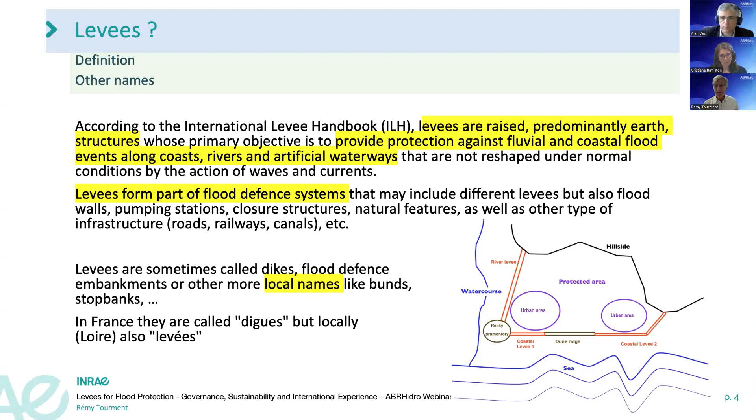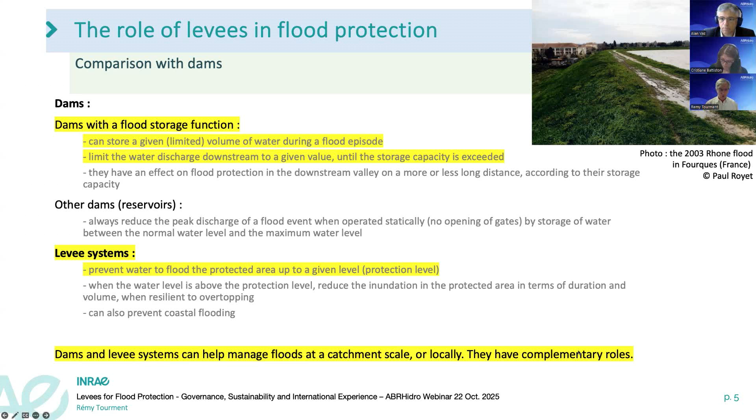When we talk about levees, we have to compare with dams, because I understood the talk about your legislation in Brazil - levees are part of the dam legislation. But in hydraulic function, dams usually have a flood storage function; dams keep water in, while levee systems prevent water from reaching a protected area. So there may be in some way an opposite function, even if both retain water - one keeps water in, the other keeps water out. In terms of flood management, both dams and levees can help manage flood at the catchment scale or locally. They have complementary roles.

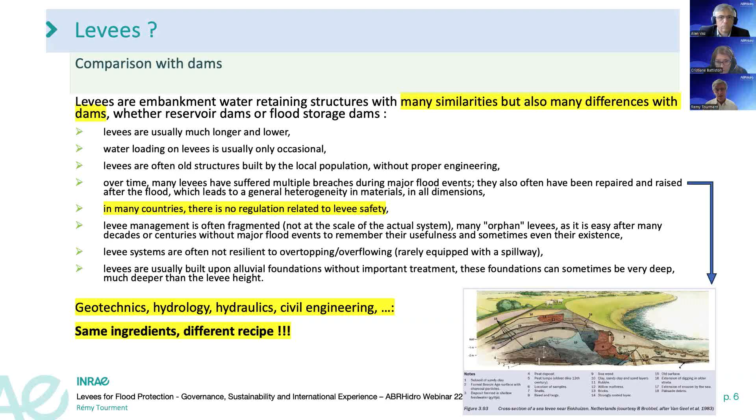Levees and dams have many similarities but also many differences. The ICOLD technical committee that I'm chairing is working on a bulletin comparing dams and levees in detail, in order to benefit from all the literature about dams for levees, and also about levees for dams. One of the main issues is that in many countries there is no regulation related to levee safety - at least that's the situation up to some point, and I will get later to the creation of this regulation. Dams and levees use the same techniques and scientific disciplines - geotechnics, hydrology, hydraulics, civil engineering - but when you look into detail, there are some differences, so I like to say they have different recipes with the same ingredients. You can see one of the main differences between dams and levees on the screen: a cross-section of a Dutch levee showing it's very heterogeneous because of its history and long length - so many differences and a different complexity.

Some data about levees in the world. We published ICOLD bulletin 196, based on about 20-25 countries, and we estimated the total length of levees across the world at over 500,000 kilometers. I hope the statistics will be more precise in the future. At least 20 countries have a major levee portfolio of over 1,000 kilometers of levees, and some of the oldest ones were constructed over 4,000 years ago, in China in particular. These levees provide flood risk reduction to over 700 million people - 10% of the world's population - protect several trillions of dollars in property and economic value, preventing billions of dollars in economic damages across the world each year.

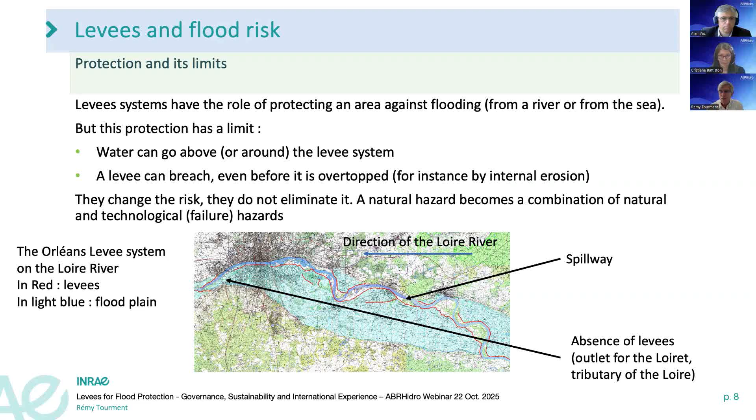And we also have to notice that from a natural hazard, which is a river flood or a sea event, we then have a combination of a natural hazard but also a technological hazard, which is the failure of the levee system.

And we also have to understand that the breach in a levee is much worse than a natural flood because of different factors. One of them is a quick event with high water level, so very important water discharge, water speed, water height, which would not be the case if the water was rising with a natural flood.

Also, populations behind the levee think they are protected. The breach is not expected, so they are not prepared. Unlike when there's a slow water rising, the limit of protection is not generally understood by the population.

And also, because of the presence of levees, there is development in flood-prone areas because they are less frequently flooded. Only the major floods cause problems, but people can forget this can happen.

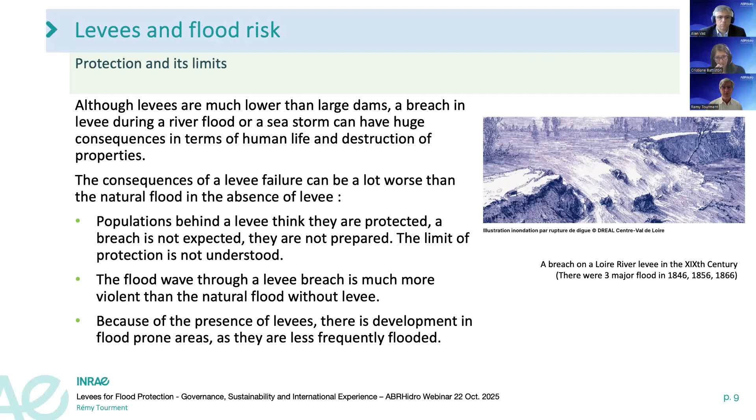In France, in order to understand and deal with these problems, we introduced the concept and definitions of protection level, safety level, and also danger level.

Protection level is a level until which the protected area is not flooded. The safety level is a level until which the levee failure probability is negligible, and the danger level is the level above which the levee failure is highly probable.

Considering independently the safety level and the protection level is very important in terms of proper risk management. Some other countries are progressively adopting this approach as opposed to a simple safety standard. In a safe levee system, the safety level must be above the apparent, or geometric, protection level, which is the level until which the protected area is not flooded if no breach occurs because the levee is overtopped.

These concepts, when you think about it, are quite easy to understand, but sometimes they are overlooked because people tend to think, well, the levee is there, it's protecting. But I will get back later on the way to deal with this issue.

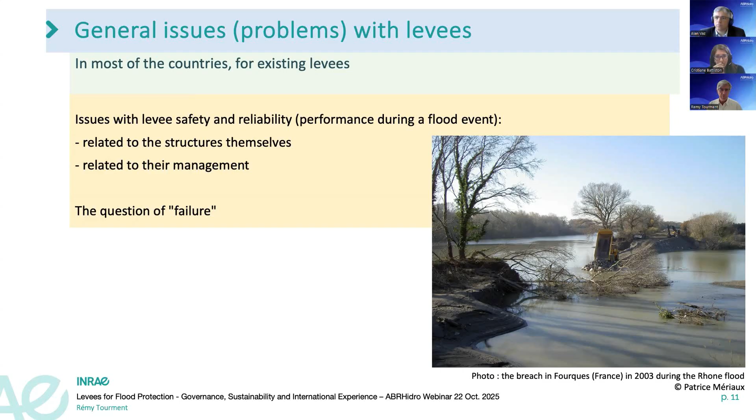The main problems with levees are caused because existing levees are often old, very old, and also aging over time, and also heterogeneous, as we have seen on this picture.

To give you an idea of the age of levees, I talked about the Chinese levees being 4,000 years old. In France, we have levees dating up to the Charlemagne Emperor, which is about the year 800, so more than 1,000 years.

Another issue is that many levee systems are not resilient to overtopping, and soon after they are overtopped, a levee will fail and cause a major catastrophic event. So you move from a protected situation to a very dangerous situation, which is not good in terms of risk management.

The performance of the levees is uncertain because they are old. There are no regular assessments. In some situations, there is even a lack of awareness about the existing levees, locally or even sometimes at the national scale.

There is a lack of information about specific levees, about their design, their construction, what happened in their history, repairs, who owns them, who manages them.

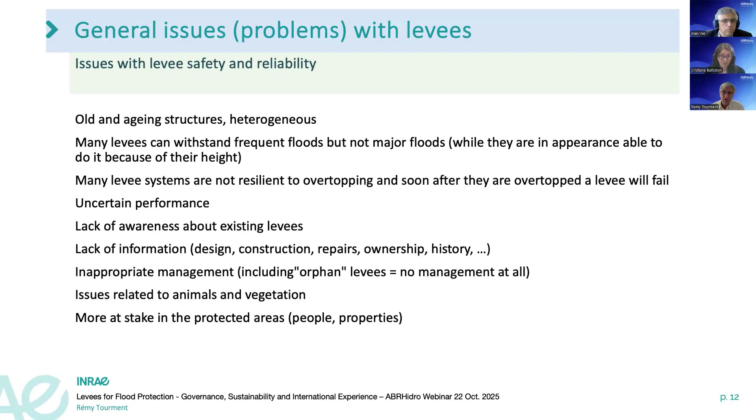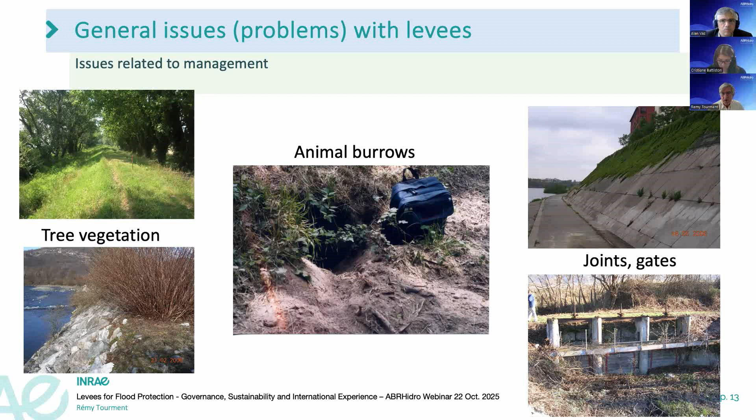Some pictures you can see on the left, vegetation grown on the levee can cause problems like internal erosion, breaches caused by the wind, animal burrows, and lack of management in the joints between the concrete slabs. Also, lack of management on the gates can create problems.

So when we started to work on the International Levee Handbook and discuss failure, we realized that unlike dams, we have to consider two definitions of failure: the hydraulic failure, which is a failure of the protection function, happening when the protected area is flooded before the intended level of protection is reached.

And the structural failure, which is more classically when a levee breaches—well, it's pretty obvious. Hydraulic and structural failures are not independent, but it's important to identify them and deal with them separately in a functional approach and in a risk management approach.

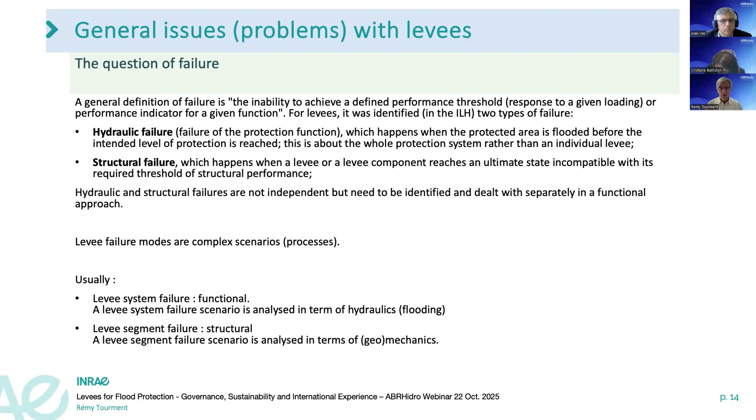Also, we have found that levee failure modes are complex scenarios or processes, and usually a levee system failure is functional—a scenario analyzed in terms of hydraulics and flooding—while a levee segment failure is structural and analyzed in terms of geomechanics, if it's an embankment levee, which is the case of most levees in France and in many countries.

Some examples of complex levee failure scenarios. We have on the screen two scenarios initiated by scouring, which happens during normal water levels. On the left, you have the levee—well, the word on the screen is dike.

Scouring causing collapse of a now unstable part of the levee. This can happen at any time. You don't need a flood.

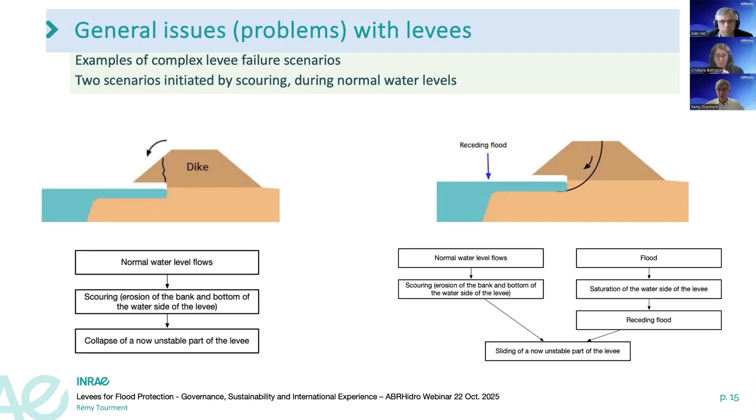And the other scenario on the right: you have scouring, which occurs during normal water levels. Then you have a flood. Then the flood recedes, and the water side of the levee becomes unstable, and there is a sliding of this part that can also cause a breach.

Two other examples of complex failure scenarios for levees involve different internal erosion mechanisms. I don't think I have time to explain these two scenarios in detail, but you can see that the different mechanisms of internal erosion actually happen successively in the same place or simultaneously in different locations.

One of the references at the end of the presentation presents this very interesting new concept in more detail. It's called failure paths for levees.

Now, the other part of my presentation, the more positive part, is how to deal with this situation. In many countries, in many places, regions, states, there is an existing portfolio of old levees that are not safe. How can this portfolio become safe and reliable in terms of flood protection?

So there are different steps. What I will present here may sound like giving lessons to countries like Brazil who haven't started this process. It's not like that—we don't know better. We all came from the same starting point.

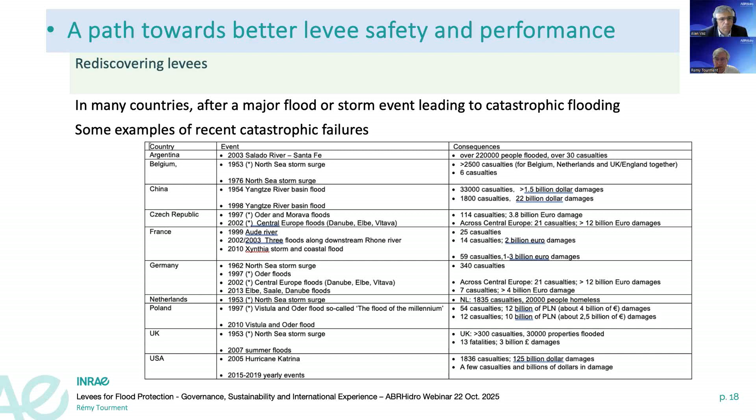So as you can see on the screen, there are sometimes a lot of casualties, a lot of damage. I don't need to insist on the catastrophic side of the consequences of levee failures. I will say it again: much more dramatic than the natural flood if the levees were not there.

After this catastrophic event, these floodings, we found that in most countries, levees were often forgotten or at least improperly managed, without a national policy, left to local initiatives, poor management. So what happened after these floodings?

In France, we have archives about flood events from the 18th and 19th centuries, and that was done in the past. But we noticed in the 20th century, when floods occurred, repairs were made, but as they were not properly managed, they were not safe anymore—tens, decades, or centuries after the repairs.

So the second strategy, which is the right one, is to have a long-term strategy for proper management to guarantee performance. Building and repairing levees as a strong structure is not enough—there is a need for management in the long term.

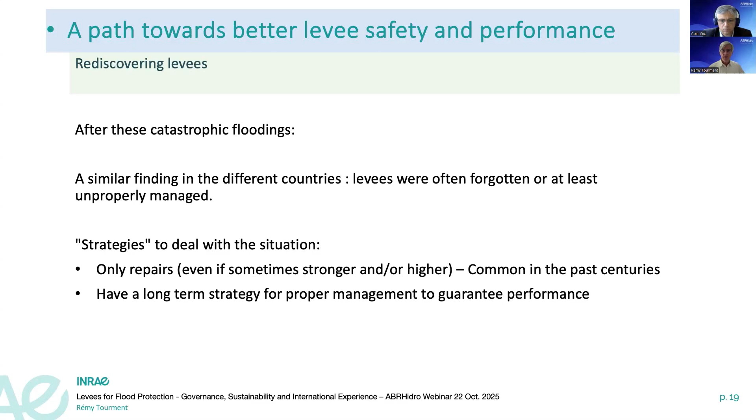So to improve the situation, there are two scales. According to the situation of the country, local stakeholders, the regulation, and the willingness of country officials or local officials, it can start at the local scale or at the national, regional, or federal scale. It depends—there isn't one right way.

It can start on one side and follow on the other scale, from bottom to top or from top to bottom. At some point you need to have all responsible persons at the local and national scale involved. There are two main axes to improve levee safety performance: management and engineering.

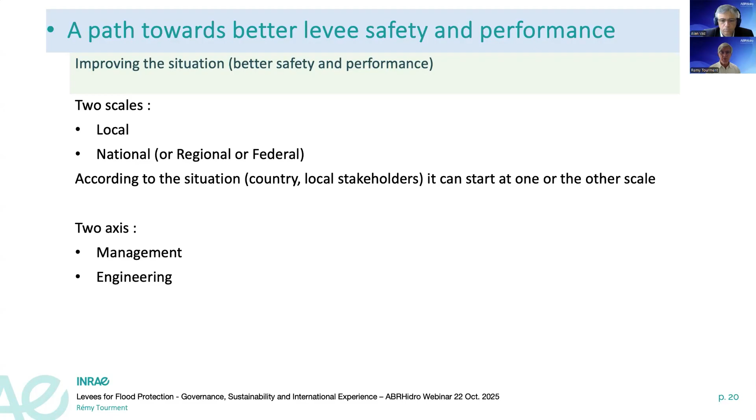The lessons learned in terms of organizing governance: levees need proper management. Management must be organized at the system level. The system level, as you have seen in one or two of my diagrams, is a system that protects a protected area—a consistent hydraulic function of protection.

These systems must not be split between different management organizations, because it will be inconsistent, and sometimes what is done on one side is useless because it's not done in the right way on the other side.

This can be at the local initiative—the organization of management—or a national decision. Sometimes even a specific regulation is needed. It's important in any case, in the long term, to have a national framework defining roles and responsibilities.

It can be similar and coordinated with dams, but it needs also to take into account the differences between dams and levee systems.

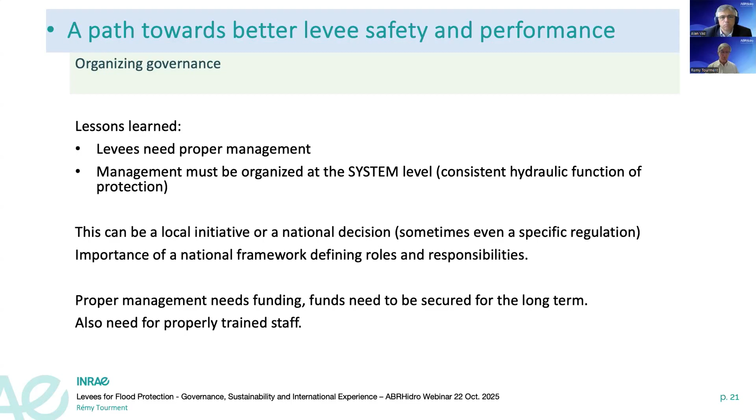So there is some difficulty. We are improving the situation in France and in many countries, but who knows what will happen in the future. We have to remind ourselves permanently that risk has to be managed in the long term. There is also the need for properly trained staff.

The role of managers of levee systems, local management, their function is to ensure that the levees will be able to perform as required during any flood event, ensuring the defined protection, no flood until the protection level, but also not aggravating the flooding of the protected area in case of a breach, structural failure, or any other type of functional failure.

I will give you an example of a functional failure without structural failure. If you have gates to close during a flood event, you may have levees with openings and gates that you need to close. Well, if you can't close the gate, or if you forget to close it, this is a functional failure. There is no structural failure, but anyway, you will be flooded before the protection level.

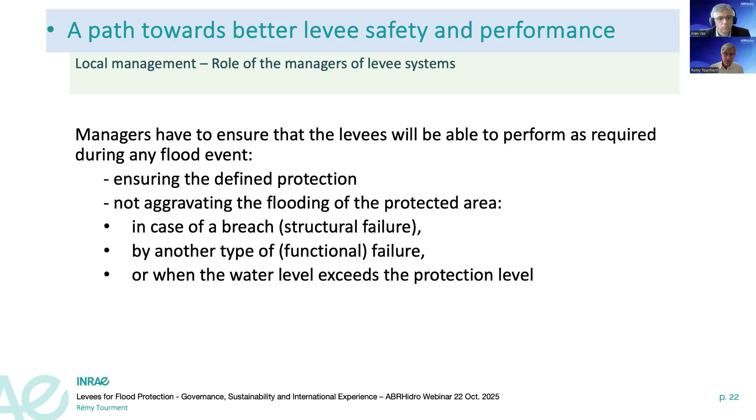Also, when the water level exceeds the protection level, you have to be sure that the resulting flood will be acceptable, will not be worse than the natural flood. So for this, the management needs to clearly define its organization.

Managers need also to manage data, the information about the levees, about the events, because it's needed in the future for repairs, for assessments. Emergency preparedness is important in order to make emergency repairs to avoid breaches during a flood.

Conduct regular inspections, safety and risk assessments. Based on these inspections and assessments, conduct follow-up actions like maintenance, major repairs in case of large damage, and even sometimes changes in the system — creating new levees, moving a levee, creating a spillway, and so on.

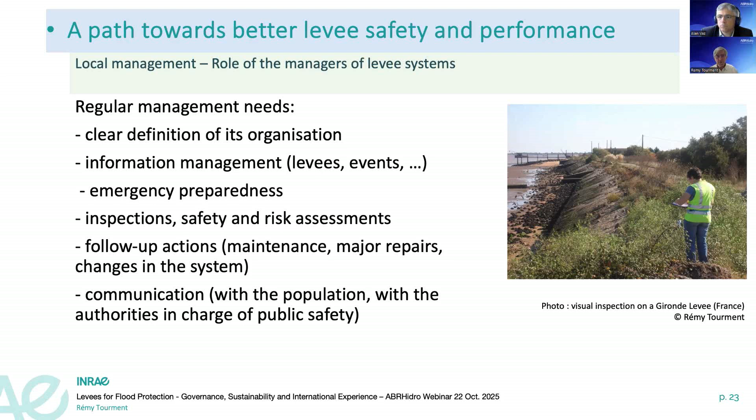And also an important part is communication with the population, for them to be aware of the risk and to have the right attitude during a flood event, but also with the authorities in charge of public safety, so they can be ready to act in case of something unwanted happening on the levee.

Then we have the high-level policy measures, at the national, federal, or regional scale. This is important to follow this order. The first step is to start an inventory of structures, of levee systems. What are their functions? What is the protected area? What is the protection level? And also include a quick safety assessment and a quick risk estimation and evaluation. This is to better understand the situation and to make decisions at this national scale.

The second step is to organize legislation, regulation, or whatever national framework of organization exists. We found that there are different types of laws and regulations in different countries. Anyway, the important thing is to organize governance in order to avoid orphan levees, so that the governance is at the right scale of systems.

An important thing also is to secure funding in the long term. It's not enough to decide that such or such type of organization will be responsible — we have to be sure they will be able to get the money to do it.

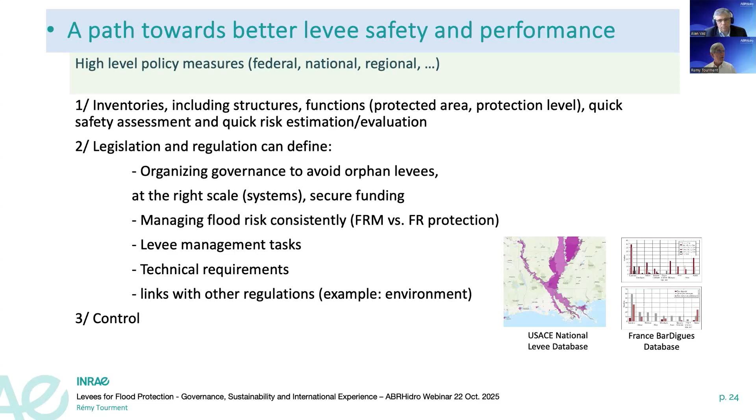So the picture presents two examples of databases that have followed the national inventory: the USA and France.

It's important that levee systems are resilient, so they don't fail before the designed protection level, and also don't fail immediately or soon after this level is reached. So it's important that the safety level is above, and sometimes largely above, the protection level. Levees should resist all mechanisms—external erosion, internal erosion, sliding—and also failure scenarios involving different mechanisms, up to a safety level largely enough above the protection level.

This can be obtained by controlled flooding above the protection level on specific levee segments that are made resistant to overflowing. This is very important because it's sometimes difficult to accept, but it's the only way to avoid catastrophic flooding, by allowing controlled flooding with a lot less water quantity, water speed, and damage.

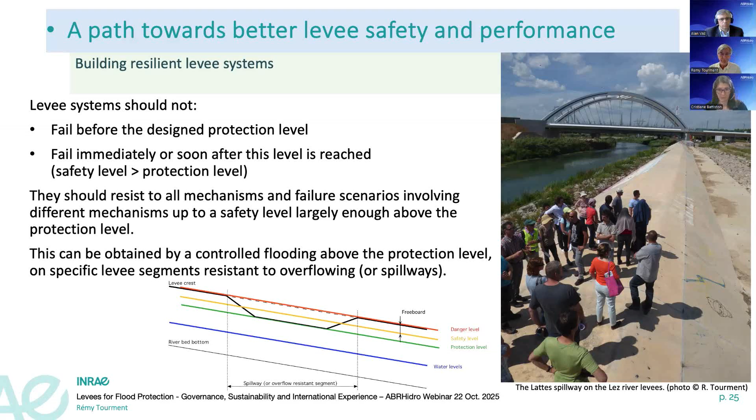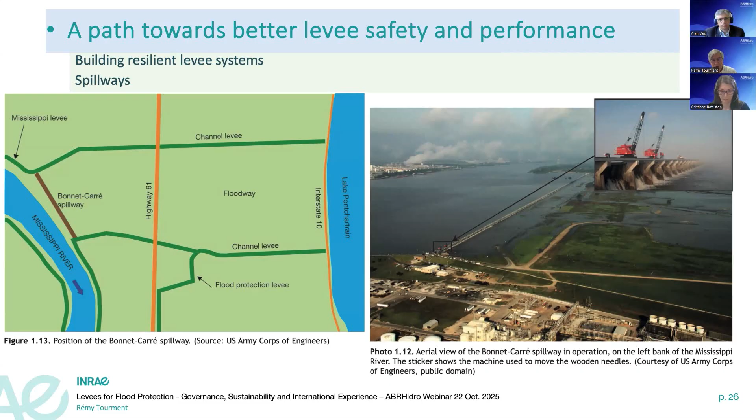Another example, different scale, again in the USA on the Mississippi. This Katrina event was not related to a flood of the Mississippi River, but you have this huge spillway, Bonnet Carré, upstream of New Orleans, which you can see operating in the picture on the right, and on the left you can see how it works. When this spillway is activated, the flood from the Mississippi River goes into Lake Pontchartrain on the right, instead of breaching levees in the city of New Orleans, which is downstream.

Then, after the organization and so on, you need technical guidance, based sometimes on international guidance. For engineering, we need guidance for design, for construction, for assessment methods, for risk analysis, for management of levees, defining inspections, defining maintenance. We need to increase the competence of specialized staff, both the managers and the consulting engineers.

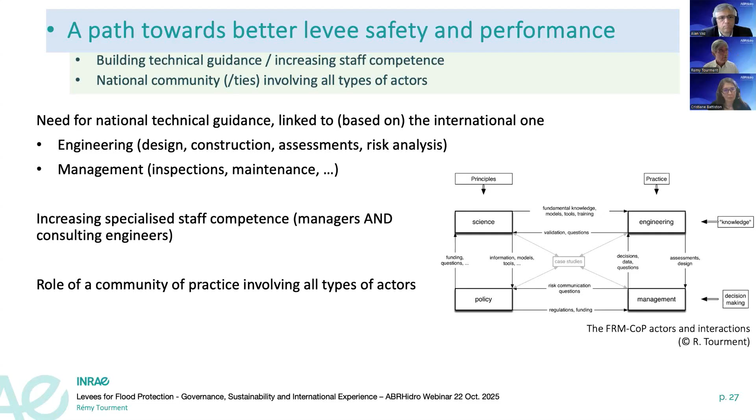So the role of a community of practice involving all types of actors—people from science, policymakers, engineers, managers—need to collaborate, to exchange information, to build this guidance together. In many cases, this is done at the level, for instance, of the National Committee of Large Dams, depending on the country. The role of this community of practice is really important because if all these different types of actors don't communicate well, this doesn't lead to great results.

Now a zoom on France. The recent history, modern history of levees—well, it's not so recent now—started in the winter of 1993 and 1994. We had two major floods on the downstream Rhone River, which flooded the Camargue Delta, marking the beginning of the modern history of levees in France. I've been personally involved with my team since this event happened because we worked on dams. We are close to this area, and naturally the state asked us to be involved in the decisions on repairing, and we've been involved with levees ever since in this area, but also in the rest of France after that.

Then we also had other major floods—you have the list on the screen—in 1999, 2002, 2003, 2010, which was a sea storm. And on the same river, frequent events on the Agly River in 2013, 14, 20. The picture on the screen is the breach of Fourques, the same city that was on my first slide, but not flooded at the moment. You can see this breach in the picture, and also all that was flooded during this flood event on the satellite photo on the right, with the location of 3 breaches on the system marked by the red arrows.

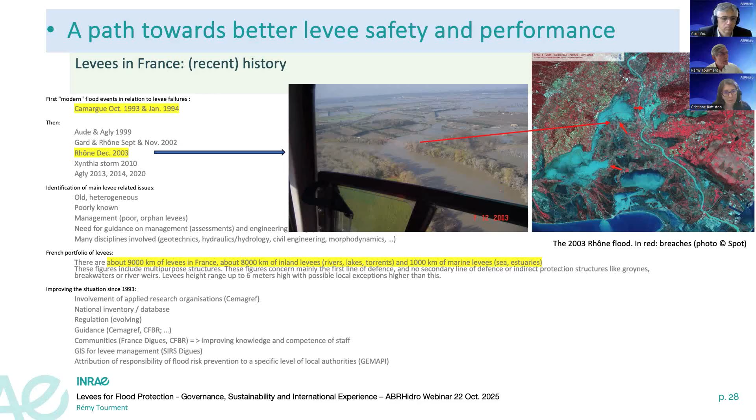So it was solved, and actually we were inspired by the organization in the Netherlands, the water boards - I wouldn't be able to say the Dutch word for it. The water boards are also independent local authorities with specific funding.

That deals with most of the issues related to levees. Maybe not in detail for everything. It's not the end of everything, it's just the beginning, but it's the first comprehensive approach to levees at the international scale.

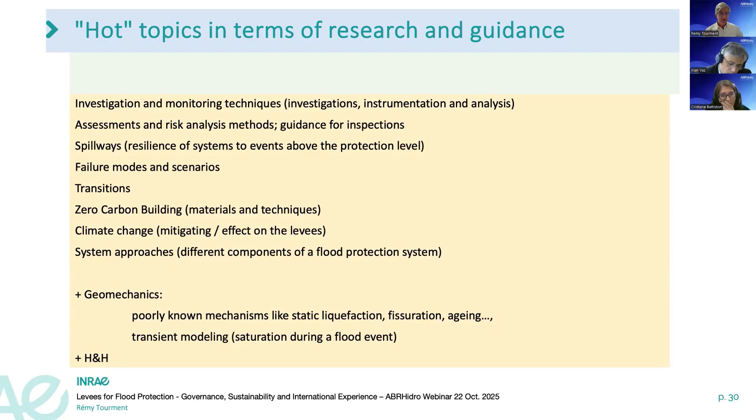Also the issues related to transient modeling. As I said, levees are dry most of the time, so there's mostly no saturated area. How do you model a levee when a flood occurs? We know how to do it, but how to do it properly is much more complicated. We still need improvement in terms of knowledge and methods.

As a conclusion, levees can help against flooding, but they need to be given the same level of attention as dams in terms of proper engineering and maintenance to be safe, efficient, and not increase the risk. Obviously, the effort can be proportionate to the protected assets. You will not spend the same money if your levee protects 20 people or 2 million people.

Building and repairing levees is not enough if they are not properly maintained in the long term, which can be a challenge. ICOLD and its European Club has an important role to play, and I will give some details next, for sharing information and knowledge and making progress together. I hope that by sharing our experience in terms of the path we followed, we will help other countries take action before catastrophic flooding occurs.

It's important to consider that protection by levees, or even by dams, is not enough. Flood risk management includes other instruments that need to be consistent.

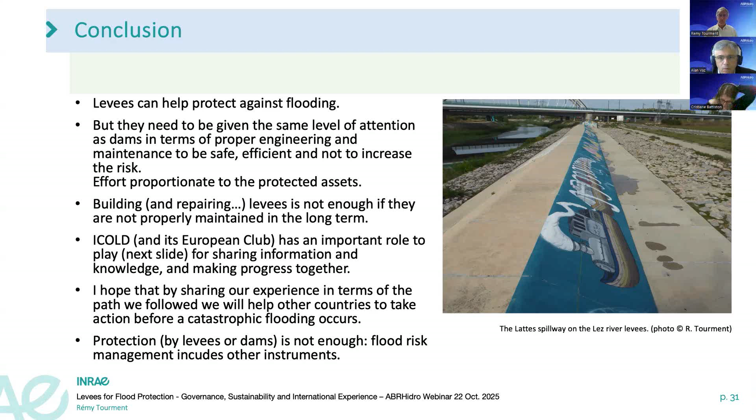Final words about levees in ICOLD and the European Club of ICOLD. We now have 17 countries in the European Club. We published a report which is available. Much more important, we have a website, a newsletter, we organize webinars, and it's not limited to Europe. We welcome contributions and members from all around the world for the website, the newsletter, and webinars.

This is not possible at the moment to organize at the ICOLD level because of the status of the technical committees. But the European Working Group is a good way to share information regularly using all these tools.

The ICOLD Technical Committee on Levees, which is much more formal, publishes bulletins - a first one about levees around the world, and one in 3 volumes that will be submitted for approval next year in 2026, comparing dams and levees on as many aspects as possible. We will present new terms of reference in 2026 to define what we will do after that, because we will have finished what we announced.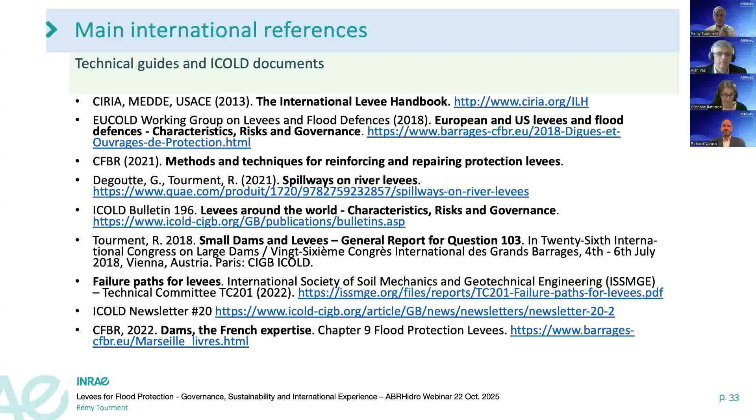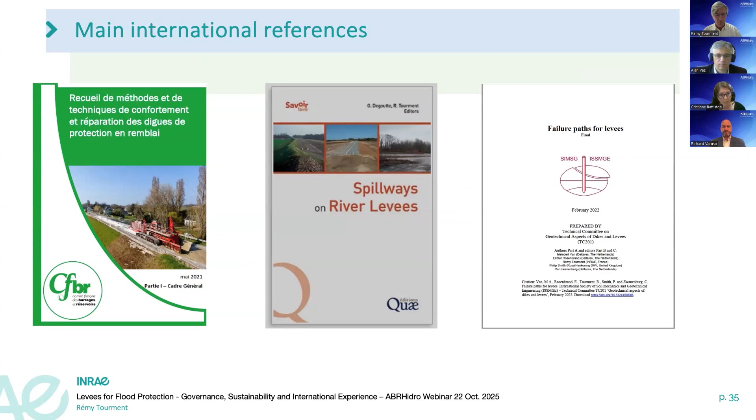We can share the presentation, a list of references - these are the main technical guides and ICOLD documents, a few pictures, and other references, mainly papers from conferences. On this slide, an important one I didn't mention before: the translation about the document on spillways, and on the right, the one on failure paths on levees, which deals with complex failure modes. Thank you for your attention.

We're a few minutes late, but not so many as I was afraid. I'm available for questions and further contacts also. There is my email.

Thank you, Remy, for your presentation. It was amazing. I had the pleasure to see your presentation at the World Dam Congress in April of this year. I have learned so much. It was a complete presentation, but thank you so much as you have customized your presentation for our Brazilian context and the issues we have been discussing.

So truly, thank you so much. I just would like to leave you a question to think about, Remy, for you to answer - Kenali has put here how the French system is organized when we talk about shared responsibilities, including among communities. He put it here in the chat. But thank you so much.

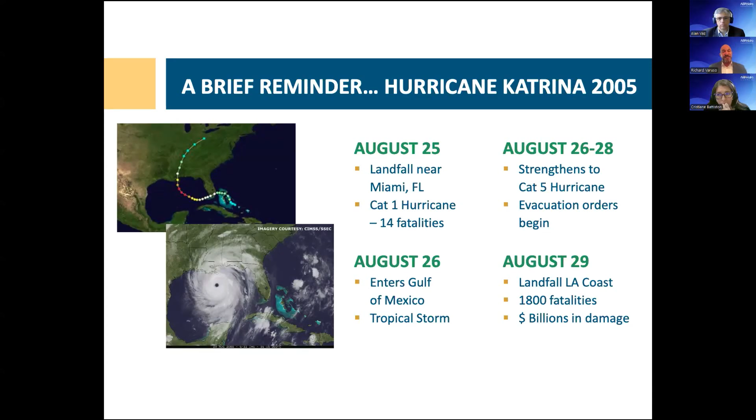Some initial lessons learned after the hurricane: despite industry standards, we had a lot of levees built around New Orleans, but it was not a complete system. That was one of the things we learned, that a systematic approach is very important—looking at an overall watershed and overall systems approach when it comes to mitigating and managing flood risk. But standards-based evaluation is not the only way for us to assess our risks.

We needed methods for more detailed evaluations of the risk associated with levees—specific evaluations of the hazards, understanding the likelihood of those hazards, performance concerns, how the infrastructure can fail, and if it fails, how will that happen. And if a high hazard and poor performance both occur, what can go wrong, what are the consequences in the leveed area, and how can we try to mitigate those potential damages?

One of the things we realized was that data collection and management of critical levee infrastructure is very important. When I first started, and even in 2005 during Katrina, we'd try to pull data related to how the levees were designed and constructed to help rebuild the system the first year after Katrina. It was old design books scattered around the office in different people's file drawers—kind of chaotic to find that data and make smart, risk-informed decisions after the event. So we very quickly realized that a central database for all our levee information was essential.

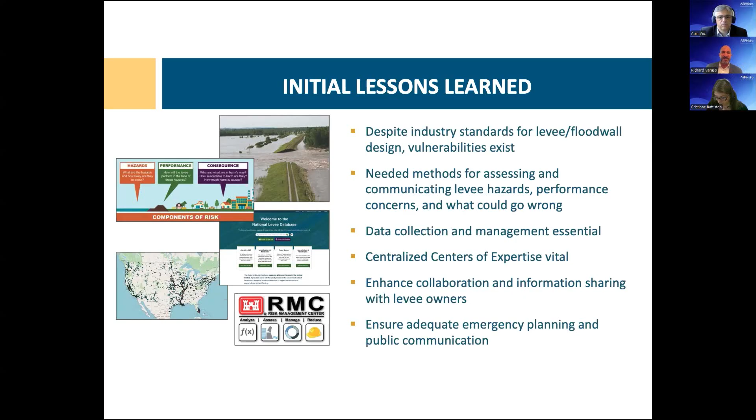I wanted to share my own experience with Hurricane Katrina, mainly because one of the things we focus on in conducting risk assessments and evaluating levees for the Corps of Engineers isn't just the infrastructure itself, but really the people that live behind the levee and the potential consequences, and how we can be better prepared to get people out of harm's way.

Folks didn't really know how much to take with them. We knew the storm was going to be a rough one, but didn't really know how much to take, so a lot of people were struggling to figure out what to take with them, what important valuables to bring.

Many people left all their valuables behind. Many other individuals felt they needed to take everything with them. So that creates a lot of stress.

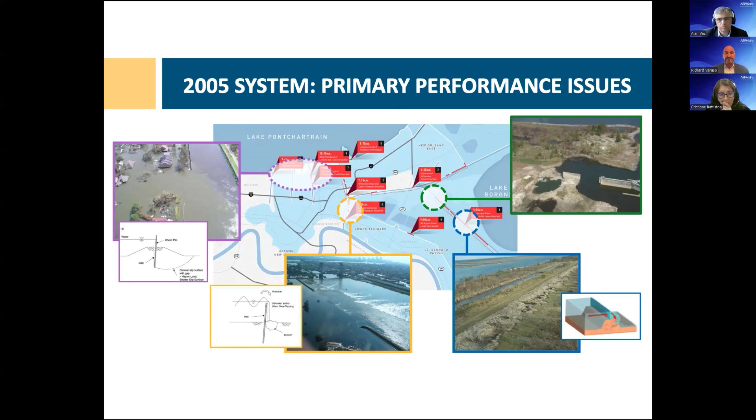So we're really looking at better ways to model, looking at more statistical methods to try and get a better sense and reduce that uncertainty in the hydraulic analysis.

In addition, climate change, sea level rise and subsidence is a big issue along the coastal areas, so we've had a big focus on trying to understand what this can look like in the future. We have an understanding of the hydraulics today, but we know that's going to change, so we want to plan and be able to either build taller or raise the infrastructure in the future, knowing that sea level rise and subsidence will increase the potential stages on those levees going forward.

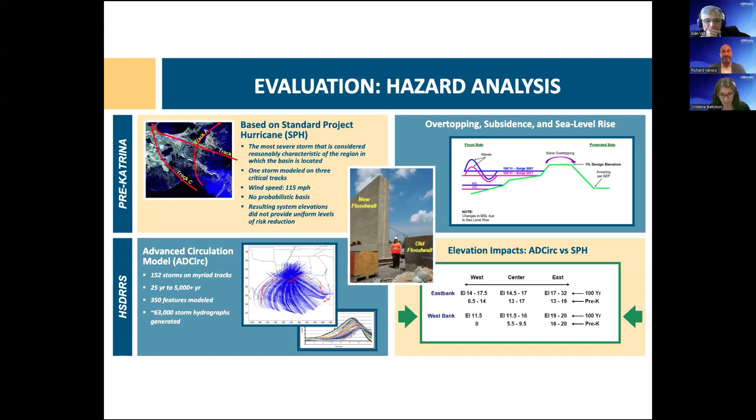We did some research on the way flood walls failed during Katrina. Our pile-supported concrete flood walls, we refer to them as T-walls or inverted Ts. We did a bunch of research from centrifuge testing and numerical modeling to come up with a more effective and efficient way to design and assess those T-walls.

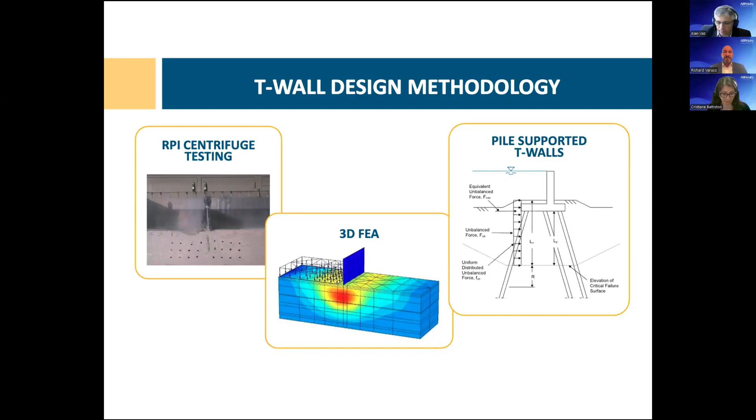The same research was done related to I-walls, just those sheet pile walls in the ground - they go to a certain penetration. We realized that mode of failure is something we learned, unfortunately, from failure during Hurricane Katrina. Again, centrifuge testing and numerical modeling gave us good insight on better ways to assess existing I-walls and potentially design future I-walls. This is one where we've seen a lot of changes around the country related to I-walls - many have been replaced, many bolstered with battered piles, and new projects typically avoid the use of I-walls if we can.

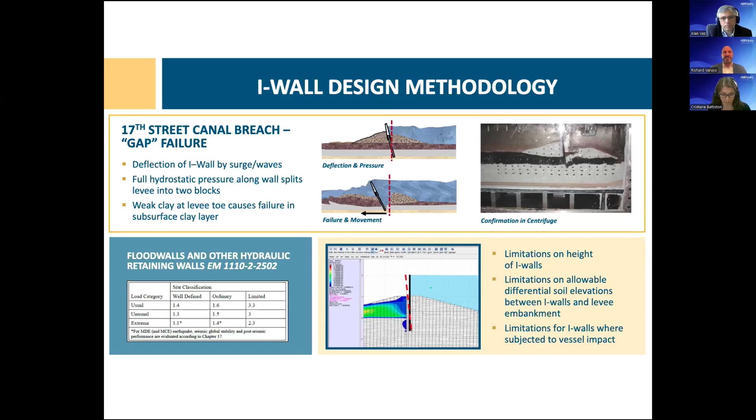The last one I'll mention related to moving forward is erosion resistance and resiliency, realizing that overtopping - as Remy said, we don't want overtopping to lead to a failure. We realize Mother Nature can bring events greater than what we've designed for, so we want to evaluate the potential erosion resistance of our infrastructure and armor behind the levees and flood walls to ensure that if it is overtopped, we don't get a catastrophic failure.

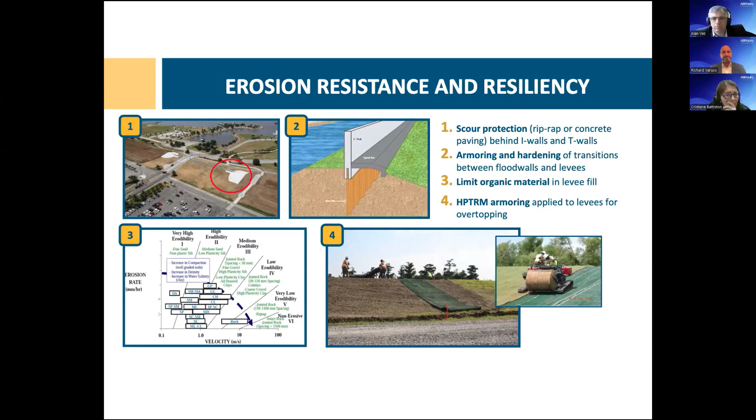Okay, now I'm going to move into organization. For the Corps of Engineers, what we learned is that we want to focus on life safety, doing risk-informed assessments of our levees and focusing on those consequences in addition to the ways levees can fail and the hazards, focusing on areas with the potential for highest life loss.

The system approach and the portfolio management approach is a very important aspect of what we've done since 2007 as we've stood up this program. Adapting and improving - as we continue to learn, we develop new trainings and new tools in order to better prepare ourselves for future events.

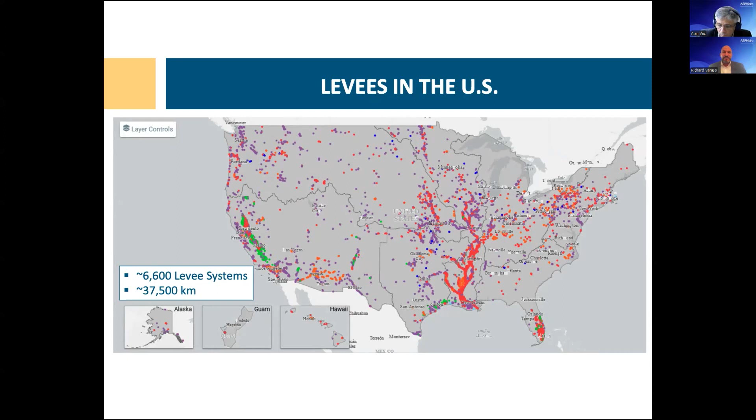So our levees at a glance: we have about 6,600 systems around the country, about 37,500 kilometers worth of levees. The vast majority of those are levees that the Corps of Engineers, the United States federal government, was not associated with the design and construction of. We've got some levees that we call USACE levees - those were federally authorized, funded, and they have a sponsor, a local partner. Once the federal government constructed these levees and construction was complete, we turned it over, and they now have the operation, maintenance, and risk management responsibility going forward.

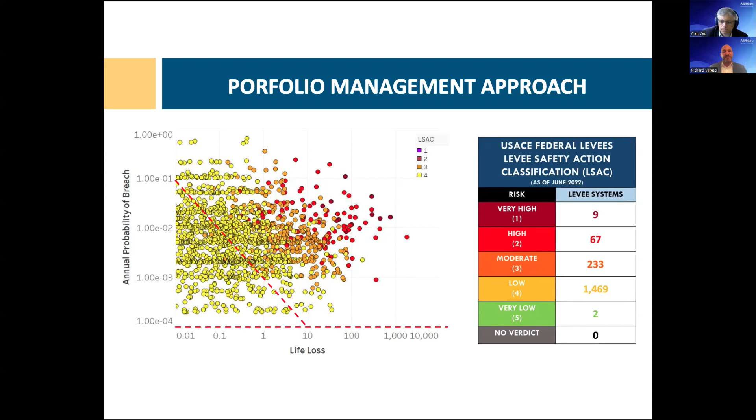One other thing I want to mention is a concept called tolerable risk guidelines. In addition to understanding the risk and making risk-informed decisions, we want to make sure these four pillars of guidelines are understood, and that our recommendations toward risk management are focused on them. Primarily: do we understand the risk as best we can? Are we building awareness within the community? And are individuals prepared to do what they can to protect themselves from flooding?

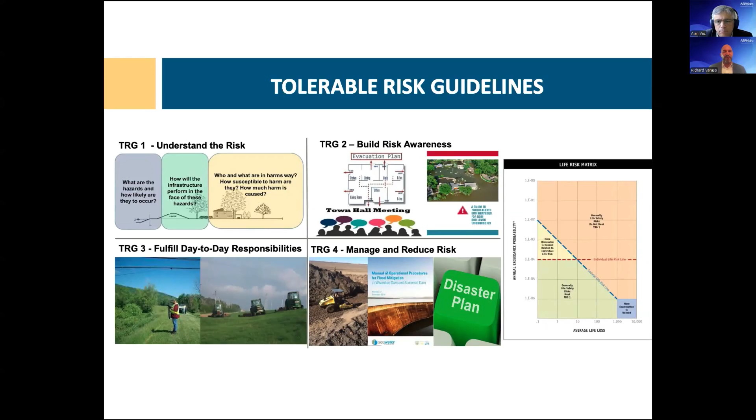Our day-to-day operations and maintenance - are we doing everything we can to keep the current condition of the levee up to speed? And lastly, managing and reducing risk - using all the information we have to make smart decisions to reduce risk going forward. That could mean reducing hazard, reducing performance issues, or reducing consequences. All three pieces of that puzzle are of primary importance to reducing risk.

I'll quickly go through a couple of these since we're getting short on time. We've developed quite a few centers to help support conducting risk assessments for the Corps of Engineers and for our partners around the country. The Risk Management Center has a lot of tools, training, and resources to facilitate our risk assessments.

We also have a Levee Safety Center that performs very similar functions but is focused specifically on levees. The Risk Management Center spends a lot of resources on dam infrastructure and risk assessments, as well as levees, while the Levee Safety Center is primarily focused on the policy and organizational structures related to our levee systems around the United States.

I'll give you a quick snapshot of the organizations from the Louisiana standpoint, though this is similar around the country. The United States is a large country with many levee systems and levee owners, and ownership isn't consistent around the country - in many cases they're state-owned, county-owned, sometimes even owned by a farmer. We have to understand, for each levee, who owns it, what the relationship is like between the Corps of Engineers and that owner, and how we can collaborate in the best way possible.

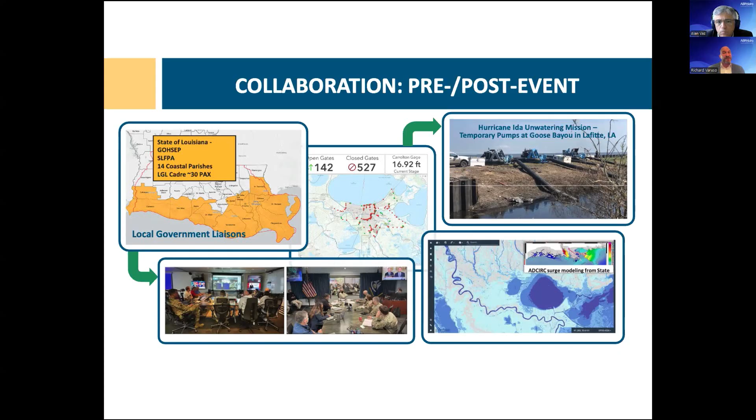We mentioned the National Levee Database. The first version of this came in 2011. It's been improved many times over the years, and it's an opportunity for not just levee owners but communities to have access to information about levees in their area, the condition of those levees, and what they can do to help manage their own risk.

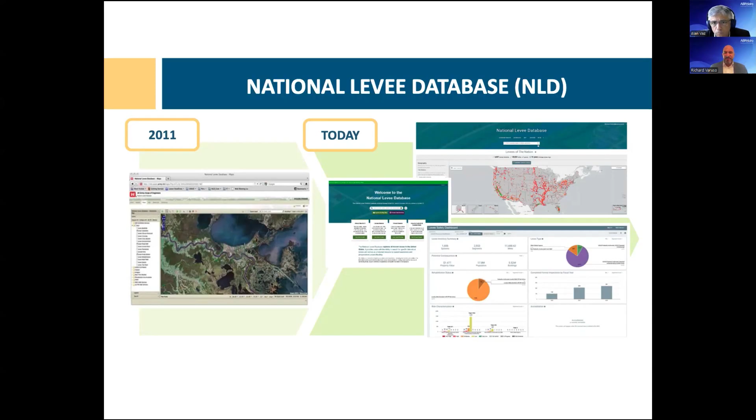I'll skip through a couple of these in the interest of time. There's a lot of information that gets into our database, and we try to be consistent about the data in there to make sure that it's accurate and up-to-date.

In the interest of time, I'll skip this one, just to say that we work with our sponsors and levee partners to make sure we're taking all the information we have and helping them make good risk-informed decisions. It's a process of collaboration that we find to be very important and very effective.

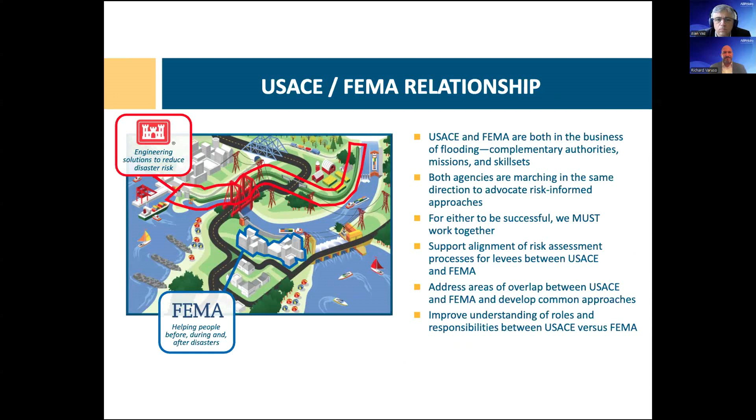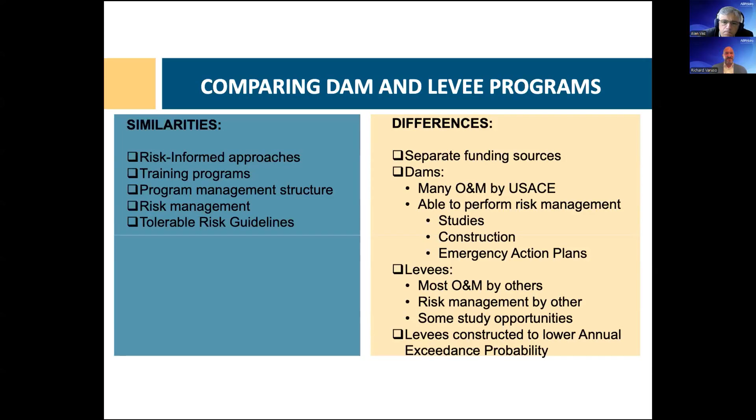In the interest of time here, I know we're running a little long. I'll stop there and we'll see if there are any questions. We can skip this one and just go to questions.

Okay Richard, we have some time still. If you'd like to complete about the system today—is this the last slide? I think it is, right? Yeah, this is the last slide. So if you'd like to conclude with this one, we still have some time, and then I'll go for the questions. Okay, thanks, I just didn't want to take people's time for questions.

So I'll just say that in the New Orleans area, it was quite the undertaking—from August 2005 to June 2006, we needed to get all the breaches closed before the following hurricane season. The amount of effort that went into that reconstruction, I cannot say enough about my fellow Corps of Engineers employees and our relationship with levee partners around the country and around New Orleans to get that bolstered up.

From 2006 to 2011, in just 5 years, the system was substantially complete. It took us another 5 years to really get everything else buttoned up. But in just 5 years, about 250 miles of new levees, flood walls, pump stations, closure structures, sector gates, and navigation gates were all designed and constructed with the help of a lot of partners in the engineering community and the private community.

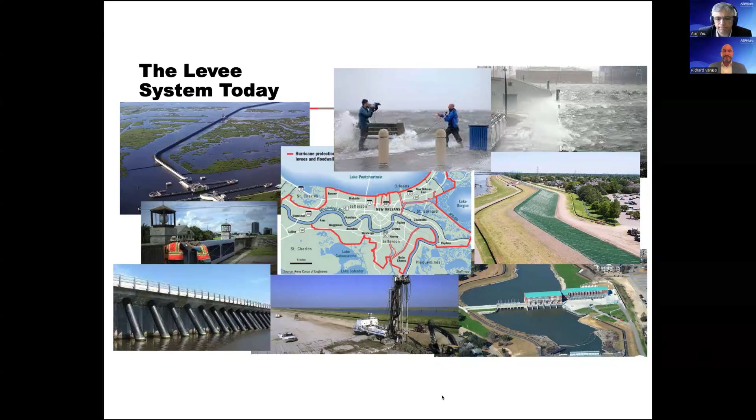Perfect, Richard. Thank you so much for your presentation, for your dedication. And I also would like to congratulate the Corps for all the work that was done in the protection of populations that rely on dikes.

The case from Hurricane Katrina - I have been in this area for 20 years, and it really is a case of global commotion. It really created this process of discussions, even international discussions, on taking care of levees. Seeing the images, I can see that it was a higher proportion than what we had imagined. And in Porto Alegre, we had people that lost their homes for many weeks, and apart from many deaths, unfortunately, that happened. So we have many similarities between both cases. It brings this commotion on us, and I congratulate you for all the work that you did to recover these areas and to improve the structures that should be more resistant for the next disasters.